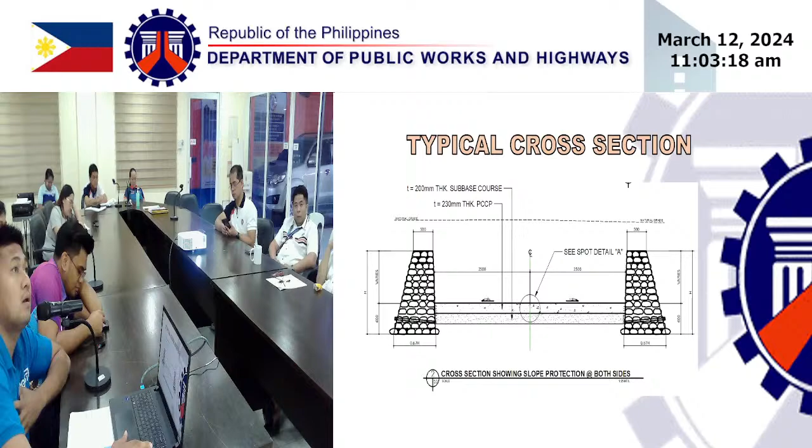Here is the typical cross-section of the project. The project consists of 2 lanes, PCCP, total 5 meters with each lane, with thickness of 230mm and 200 millimeter subbase course. Site photos. Thank you.

For the second project, project ID 24AE0094, to be discussed by Engineer Milito Pinto. Good morning, everyone. The next project is the concreting of Sitio Bangar, Barangay Lipay Sur FMR, Barangay Lipay Sur, San Gabriel, La Union. Name of project: Concreting of Sitio Bangar, Barangay Lipay Sur FMR, Barangay Lipay Sur, San Gabriel, La Union.

Target length is 0.73 lane kilometer. Station limits 00 to 365. Appropriation 10 million, ABC 9,950,000. Source of fund, Department of Agriculture, GAA 2024. Total project duration is 91 calendar days.

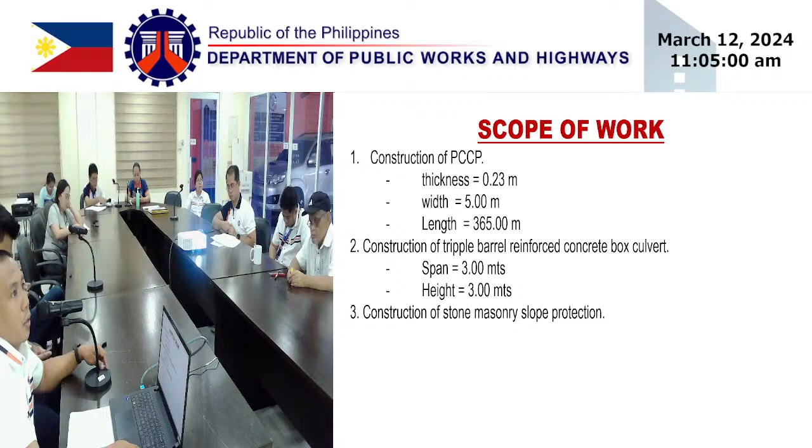Scope of work: construction of PCCP, thickness 0.23, width is 5 meters, and length is 365. Then another is construction of triple barrel reinforced concrete box culvert with a span of 3 meters per barrel, height of 3 meters. Then construction of stone masonry slope protection. Program of work: field office, then we have the permanent monument markers as standard for DA projects.

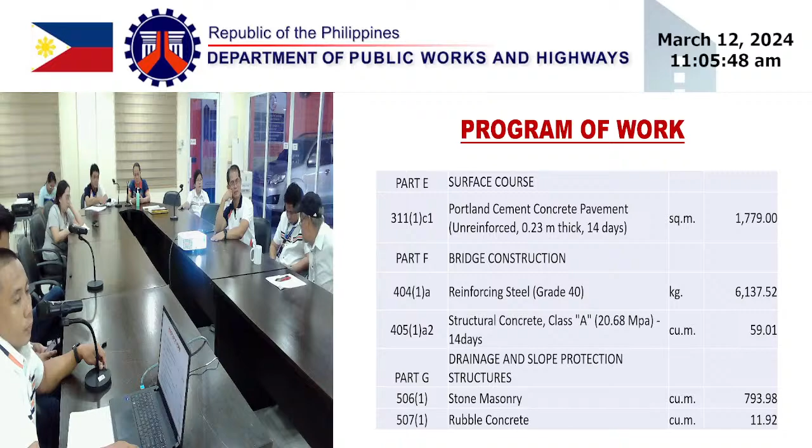Then excavation is soft rock. Then may rubble concrete po sa bottom ng RCBC.

Minimum equipment required. Ito po yung start ng project. Bali yung Lipay Sur po yung parang yung barangay LIPAY din. Start po ng project, then dito po yung end. Yan, parang ganyan po yung alignment niya, yung proposed farm to market.

Then ito po yung start ng project. Then dito po yung proposed reinforced concrete box culvert para hindi po siya clear. Then end ng proposed RCBC. Station 200, then end of project. Then yung benchmark, may existing electrical pole. And special project features, the DA marker. Yan po, lalagay po start and end of the project.

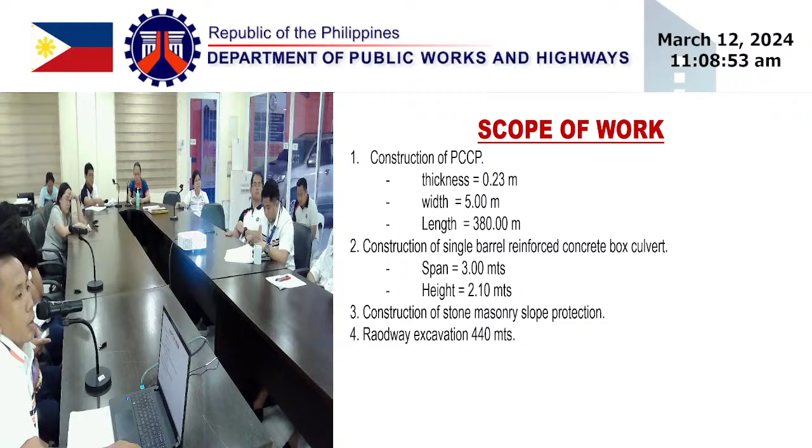Scope of work: construction of PCCP, thickness 0.23, width 5 meters, length 380. Construction of single barrel reinforced concrete box culvert, span 3 meters, height 2.10 meters. Construction of stone masonry slope protection. Roadway excavation 440 meters.

Yan din po yung report. Excavation is soft rock. Vicinity map, dito po yung start. Then dito po yung end. Ayan po yung proposed na alignment.

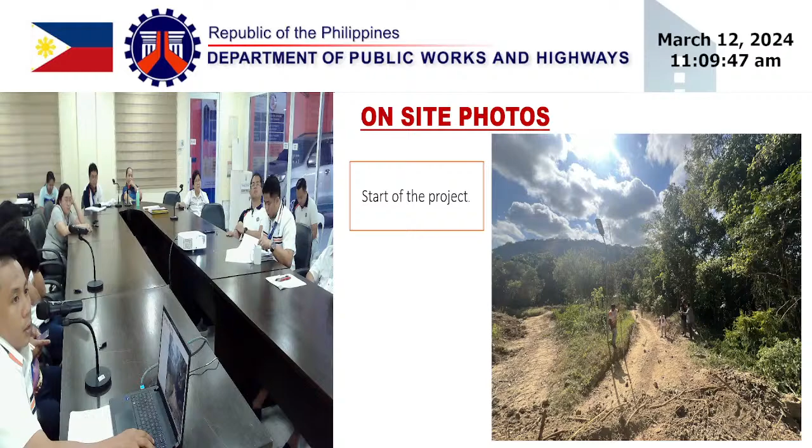Start of the project. Bali yung palang po, yun yung ongoing DAR same location sa San Gabriel po. Then station 140, critical section. Station 180, bali dito po mare-redesign po yung existing alignment, yung profile, kasi very steep po yung kalsada, yung barangay, hindi po kaya ng mga 4 wheels. Then location of proposed RCBC, then end of project. Special project features, the DA marker to be erected at start and end of the project. That's all.

Contract ID 24A0096.

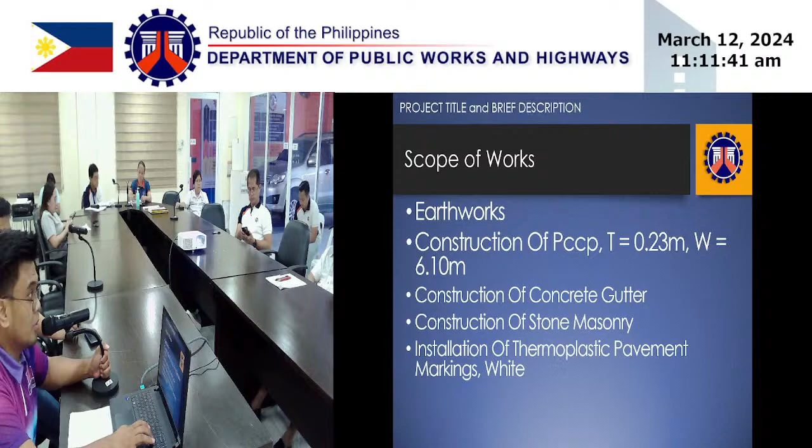The station limits for this project will be Station 00 to Station 560. The scope of works for these projects are the following: earthworks, construction of PCCP with a thickness of 0.23 meters with a width of 6.10 meters, as requested by the LGU of BACNOTAN. Construction of concrete gutter, construction of stone masonry, and installation of thermoplastic pavement markings, white, and installation of solar street lights to be located at strategic places within the project limits.

The summary of quantities are the following: consist of monument markers, earthworks, surface courses, subbase and base courses, drainage and slope protection structures, which is the stone masonry, the concrete pedestal for the street lights, and some other miscellaneous structures such as concrete gutter and thermoplastic pavement markings.

Project photos at start, intermediate sections, and end of project. That's all, Vicky.

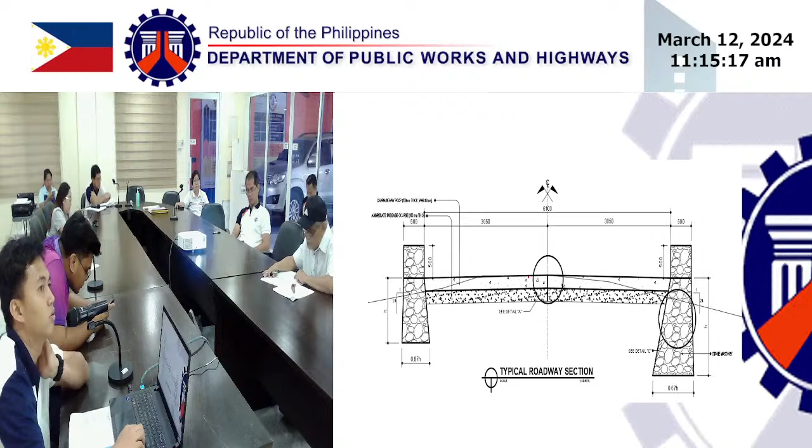May existing na po dito na PCCP po, PCCP. Ito po yung typical roadway section. Tapos ito po yung typical single arm post plano po na. Ito po yung start ng project. Intermediate photos.

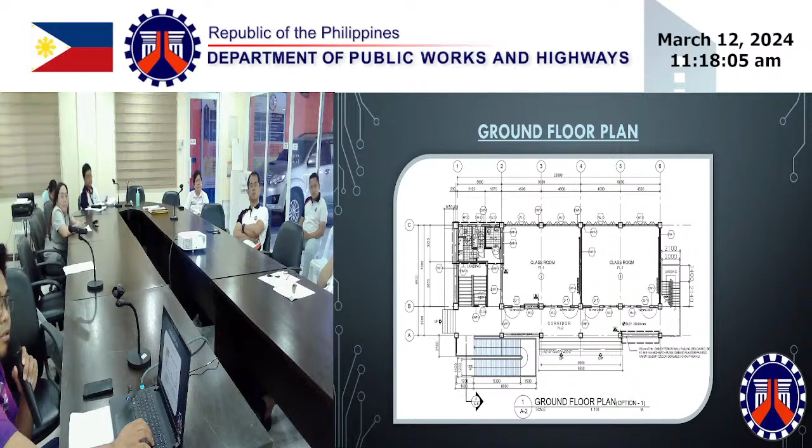classroom school building, installation of water pumping system elevated at 0.6 meters above natural and above NGF, tile works at ground floor classrooms. This is the summary of quantities, standard pay items for standard school building. Project location is here. This will be the standard ground floor plan for this project and the second floor plan and the roof deck floor plan.

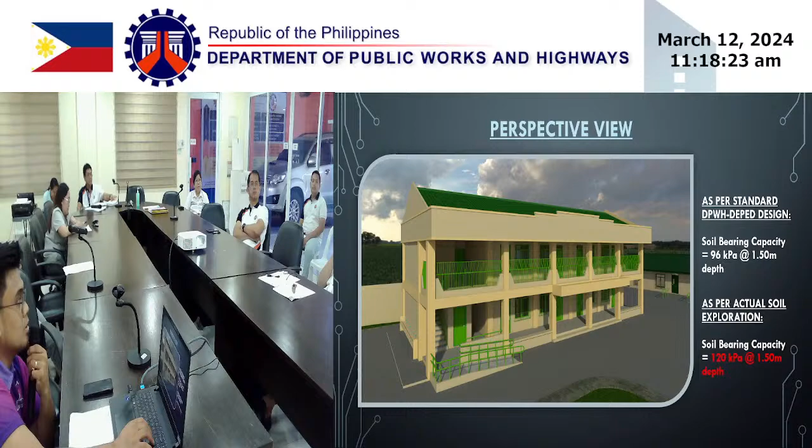Minimum equipment requirements: backhoe, dump truck, and concrete vibrator. Site photos, and this will be the perspective. And this is the original foundation plan. The depth of footing will be 1.50 meters.

Steelworks for 16 millimeters and above will be grade 60 and below 16 will be grade 40. For concrete works, all structural elements, including columns and beams, will be 4,000 PSI and slab on fill will be 3,000 PSI.

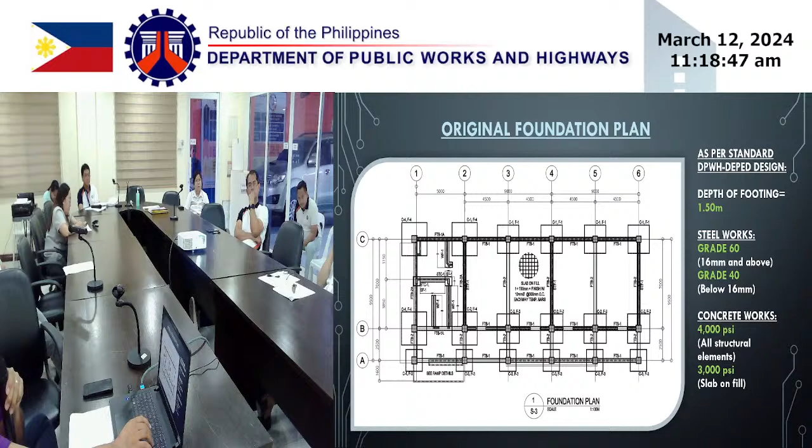That's all. Thank you. Next project will be the construction of one-story two-classroom school building in Dasay Elementary School, Barangay Dasay, San Juan, La Union.

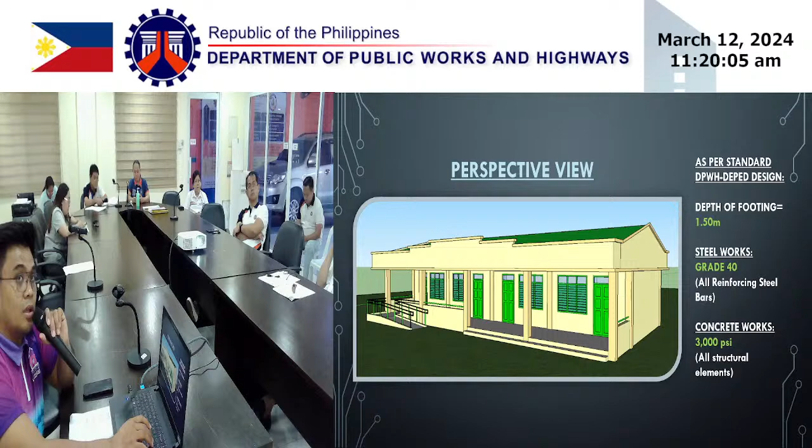These are the minimum equipment requirements: backhoe, dump truck, and concrete vibrator. Site photograph. This will be the perspective view. The depth of footing will be 1.5 meters from NGL.

All reinforcing steel bars will be grade 40. And all concrete works will be 3,000 PSI. That would be all. Thank you.

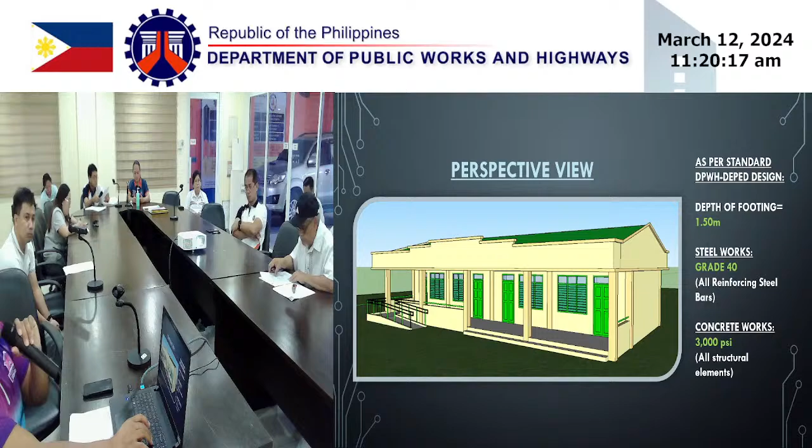Okay, for the next agenda will be the review of requirements of bidding to be presented by Engineer Bigo. Good morning. For pre-bid conference discussion, the required bid docs fee for the following projects.

For 24AE0093, required bid docs fee is 200,000. For 24AE0094, the required bid docs fee is 10,000. For 24AE0095, bid docs fee of 10,000. For 24AE0096, the bid docs fee is 25,000. For 24AE0097, required bid docs fee is 25,000. For 24AE0098, the required bid docs fee is 25,000. And for 24AE0099, the required bid docs fee is 10,000.

And for the bid activities for the 7 projects: first, advertisement of invitation to bid is from March 2, 2024 to March 8, 2024. Second, issuance of bidding documents, March 2, 2024 to March 13, 2024. Pre-bid conference today, March 12, 2024. Receipt and opening of bids is on March 25, 2024.